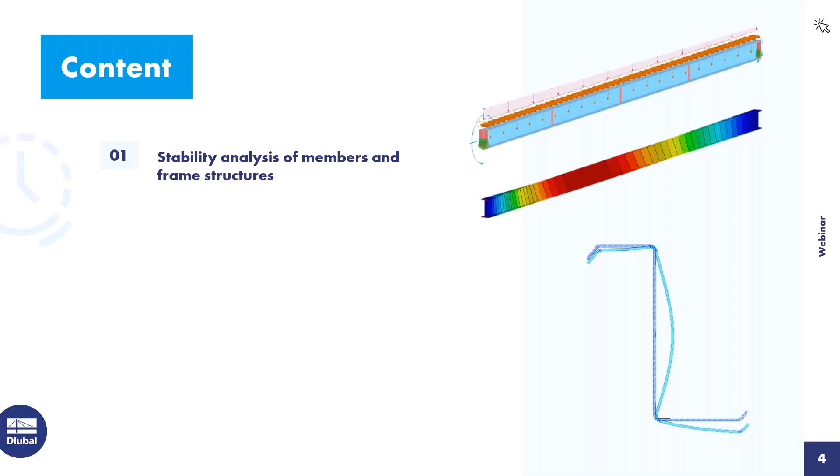Thanks Andreas for the introduction. Within this webinar, I want to show you the linear stability or bifurcation analysis that we can use in RFEM 6 as a tool to assess structural stability. I want to show you how to use this tool and where it is used internally in the background to assist the design of, for example, steel members. I would like to demonstrate this on some smaller example models that I have mostly prepared before, so we will jump into more or less finished models instead of focusing on the modeling of more complex structures. We will do that maybe next time again.

And the table of content looks like this. First I want to focus on the stability analysis of members and frame structures. Second, I want to go to the stability analysis on a cross-section level using the finite strip method. Then I want to show you how the buckling analysis is integrated in the steel joints add-on. And lastly, I want to show you how we can use the structural stability add-on for troubleshooting of instabilities, how we can leverage that for that purpose.

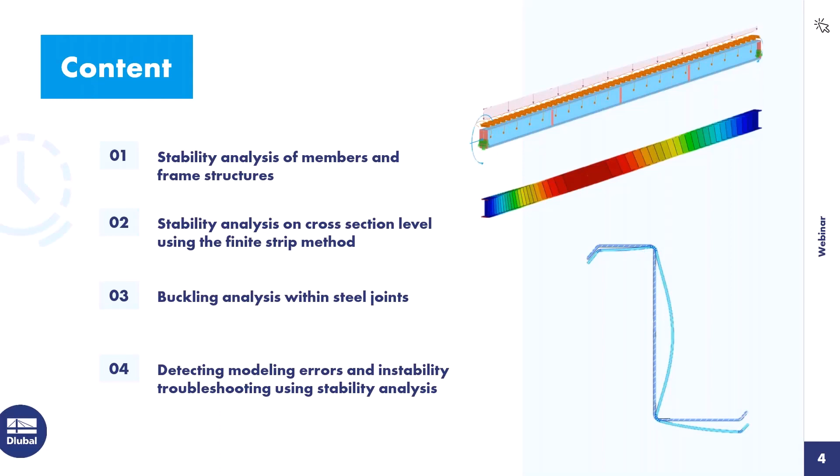Okay, before we jump into the first model, I want to give you a brief introduction and explain at very least a few points that are related to the stability analysis and how we perform it in RFEM 6.

What elements or structures are we taking care of with this analysis method? It's usually slender members and structures under compression that tend to become unstable, where the slenderness of a member or a structure is not only defined by its dimensions. The greater the length of a structure or member compared to the cross-sectional dimensions, the more slender and prone to instabilities it is, but it's also related to material properties. So if I have a material with high strength and low stiffness, then it's more likely that stability failure will be the critical design element as opposed to cross-sectional failure.

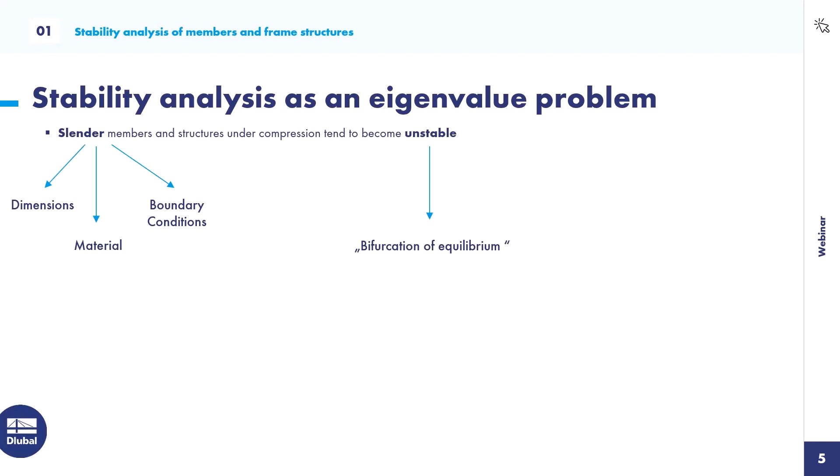Lastly, the boundary conditions play a major role. If I have rotational restraints or lateral restraints for our member, it's not that likely to become unstable. And what do I mean with unstable? When we reach the unstable state, we have no clear state of equilibrium. We instead have a bifurcation of equilibrium, meaning there are multiple paths that the structure may follow. That's why this linear stability analysis is often referred to as linear bifurcation analysis, or LBA. I might use that abbreviation throughout this webinar. Also, the critical load may sometimes be named the bifurcation load.

Using the FEM, the ideal bifurcation load can be determined by solving a conventional eigenvalue problem. So we can set that up and solve that.

In that context, what does ideal mean? It means for the stability analysis that we treat the structure as linear, so we assume a fully linear structural behavior and a perfect geometry. So the base geometry of our model is used in this stability analysis.

The eigenvalue problem in the general formulation has two symmetric matrices, A and B, the eigenvalues lambda, and the respective eigenvectors x. To solve for the unknown eigenvalues lambda, we have to set the first term of our formula to 0, and that's mostly done by calculating the determinant of this first part in the bracket and setting it to 0.

We have multiple numerical tools or solvers to do that determinant determination. In our specific case, in the stability analysis, our two symmetric matrices are represented by the linear stiffness matrix and the geometric stiffness matrix.

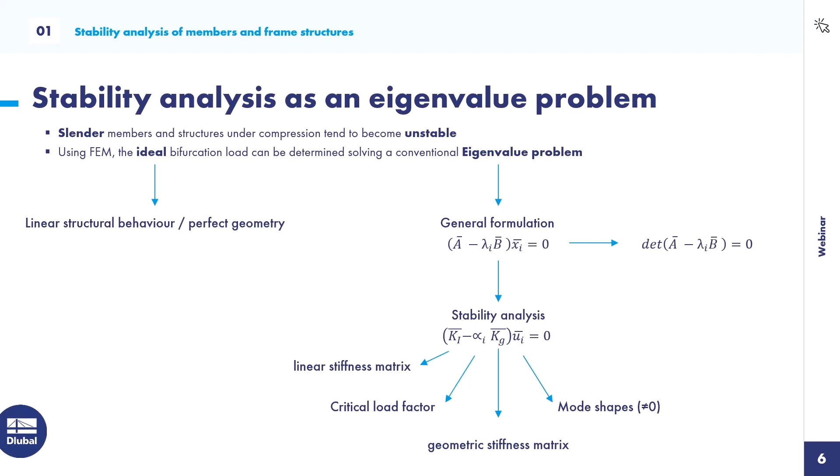We want to start with some fundamental solutions that are very well known amongst civil engineers. Euler already in the 18th century provided some simple analytic solutions for prismatic members under pure compression. They are well known as the Euler cases.

Let's jump into the program, I have prepared some smaller models for you. The first one is this simple Euler case. I have an HEB 300 beam with a length of 5 meters, and I applied a unit load of 1 kilonewton that sets the member under compression.

In order to perform a stability analysis with our add-on structural stability, I need to first activate it, and I can find it in the base data of the model. I activate the respective add-on here, which you can find under analysis add-ons, and click OK.

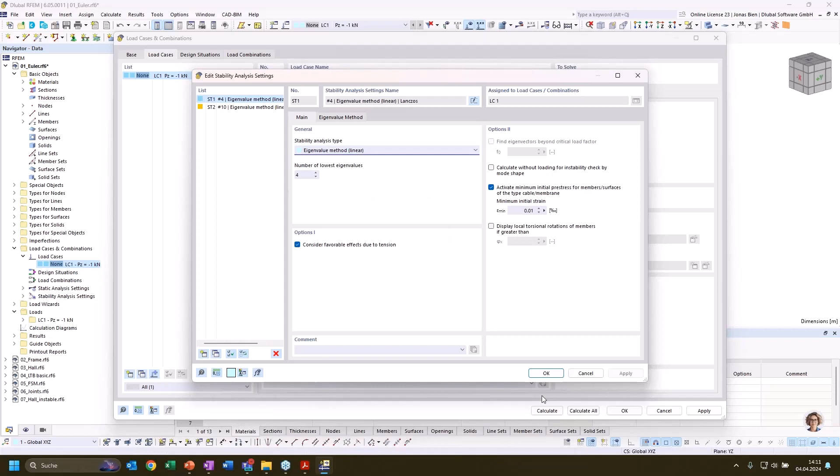Four eigenvalues are enough for our simple case, so I keep this number set here. Then we have multiple solver variants to solve the determinant of our eigenvalue problem, but the default solver should mostly suit us for this problem.

There might be cases where you have subsystems that are not connected to each other. Then this default solver will throw an error and suggest another solver variant. But with these default settings, I can just run the load case.

Now the first thing the program does is solve the static analysis, and then solve for the stability analysis. When I have performed the stability analysis, I not only get the results for the static analysis, but I can also switch to the stability analysis results through this drop-down menu here.

Okay, so what do we see here? First of all, we get a drop-down menu in the upper left corner, and in the table we can see that we have these 4 mode shapes calculated with a respective critical load factor.

This represents the factor which I can multiply the external load with until my system would collapse due to instability. So if I would increase the unit load of 1 kilonewton up to 7,035 kilonewton and run a second order analysis, my system would become unstable and I would get an error message.

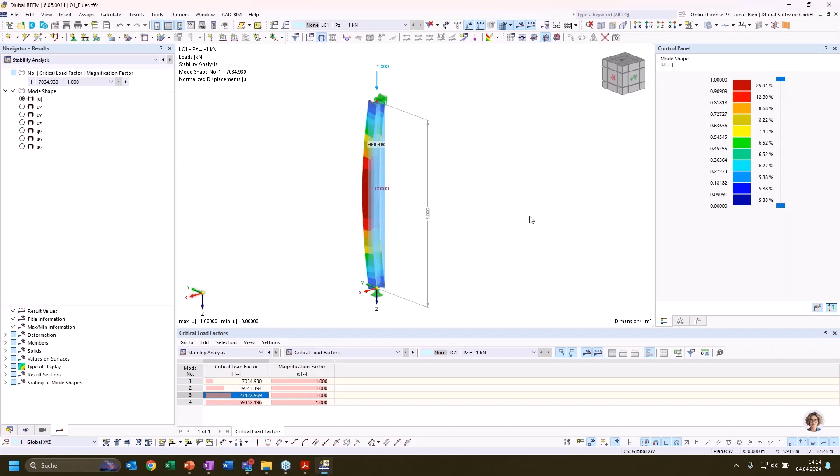Okay, so we can go through the 4 eigenmodes here by clicking the table entries, or also go through the entries in the drop-down menu. We can see the first eigenmode resembles buckling of our I-beam around its weak axis, and it's doing that in a symmetric way. We have a simply supported beam here, so that looks as expected.

Then the second mode shape would be buckling around the strong axis. And the third and fourth eigenmodes are some multi-wave eigenmodes for buckling around the weak axis. These are mostly not very interesting for us, so usually only the mode shape with the lowest critical load factor is of interest for us.

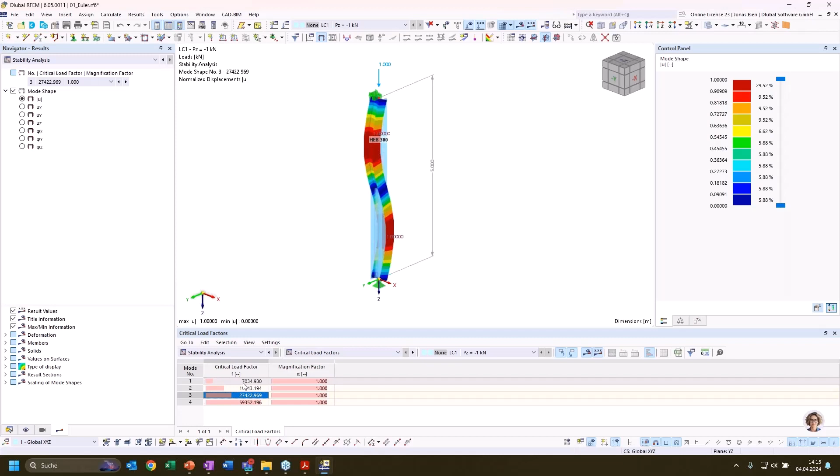And I want to now compare the critical load factor that we have calculated here with the critical ideal Euler load that we have for our Euler case 2.

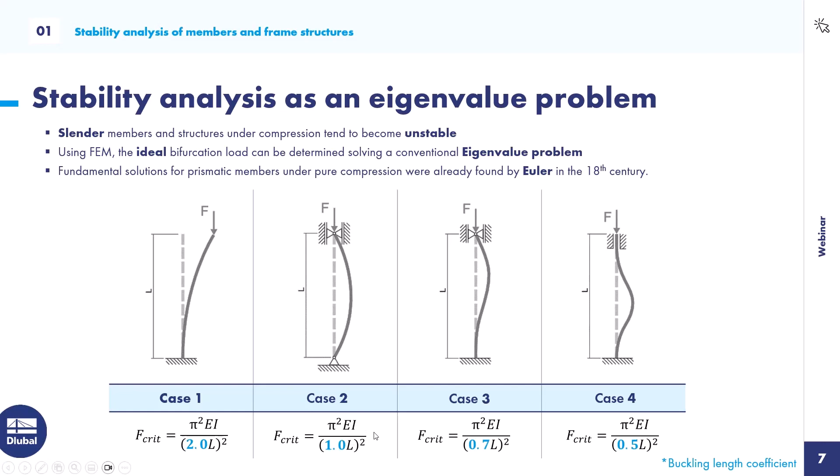Just so that you remember, we could calculate it using this formula: pi to the power of 2 times the Young's modulus times the moment of inertia of our section, divided by the effective buckling length. In this case, it would be the length of our member times 2, to the power of 2.

I could do that using my calculator, but then I would need to look up all the values for my section, the member length, the material properties, and so on. So I want to show you an alternative solution. We can also use the in-app console that we can open via the toolbar, and in here I can reference all the objects that I have in my model.

For example, I could reference my material number 1 by typing this, then typing a dot, and then I see all the options or properties that I can ask this object for. For example, I would find the elastic modulus here, and if I press enter, I get as an output the elastic modulus of our material number 1 in SI units.

So that's important, and of course I can do some more complex calculations here. I could now take this elastic modulus and multiply it with the moment of inertia of my first section.

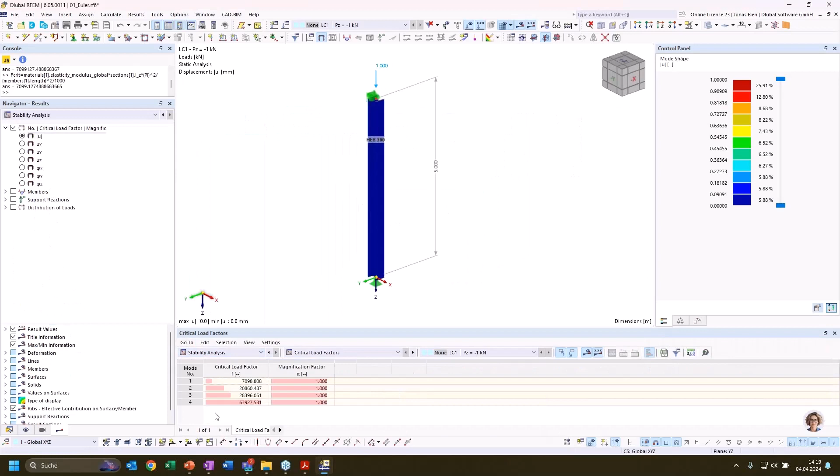And if I again go to the results, we now see that our critical load factor is much closer to the ideal Euler load.

It's really it compares very, very well.

So we could, of course, also calculate the critical load for buckling around the strong axis. Just we need to swap the Z with a Y value, and we have the moment of inertia about the strong axis. This value is quite satisfying if we look at our result compared to the structural stability add-on. So that compares quite well. We've, as we expected, met the results of the analytical formula.

Okay, now that that's set and we are confident that our solution here provides reasonable values, I want to show you another important result of our stability analysis when it comes to member results. This is often used for the later design of the column. If we, for example, would take a classic approach to design this steel column using an equivalent member method, we would need the effective buckling length, and we can use the structural stability add-on to calculate it.

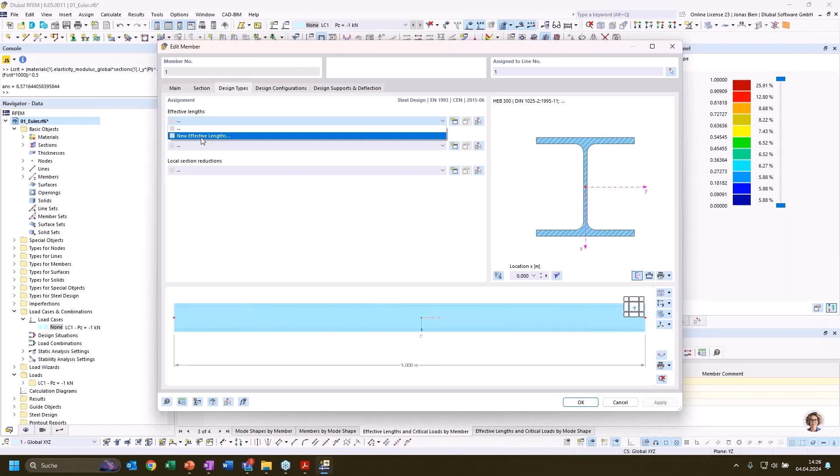One thing I want to show: we can directly import these buckling lengths into our design add-on. So if I want to design this column here with our steel design add-on using the equivalent member method, I have to assign these effective lengths.

Here I have the option to import the buckling length from the stability analysis. If I click this, we get another tab where I can enter the load case, the mode shape, and the member number. Now it would take this buckling length coefficient from mode number 1 for beam number 1 and evaluate the effective buckling factor for the design.

In this case, we have to take care that buckling around the strong axis happens in mode number 2, so we would need to enter mode shape number 2 here, and mode shape number 1 would be for the buckling length coefficient for buckling around the weak axis. So that would fit and suit our expectations.

Of course we can do that for more complex systems as well. We just need to keep in mind that when we have a more complex system and change something, the order of the mode shapes can also change. They are always sorted by the lowest eigenvalue or lowest critical load factor, so the mode shape with the lowest critical load factor is always mode number 1. If we change something in our system, this sorting can change, but these entries need to be checked again because they are not smart enough to adapt to the changed model, so we would do that manually.

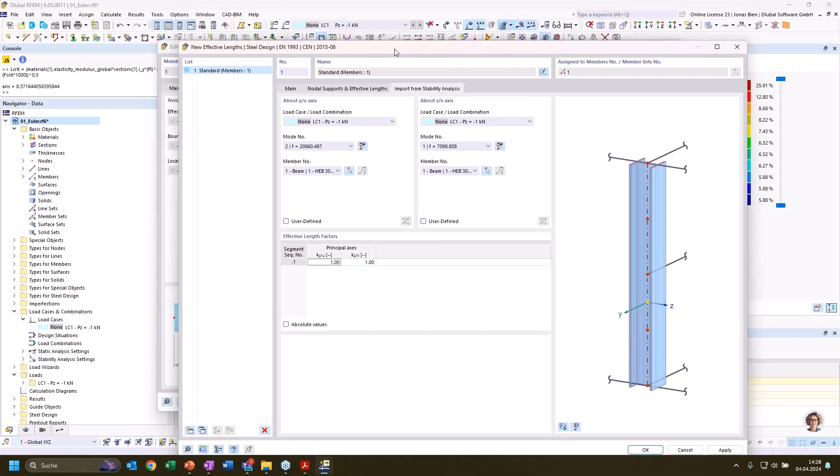So sometimes it's just better to do the stability analysis and then manually put in the buckling length coefficients here, and we don't need to make any more thoughts about it.

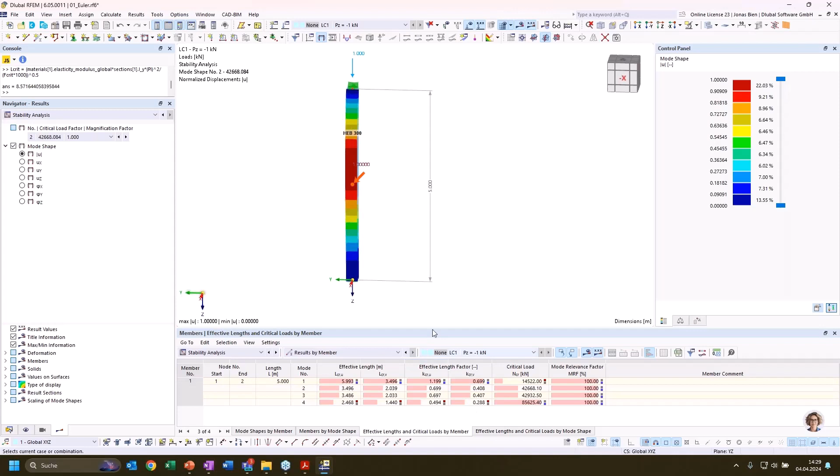But that's not what I want to focus on now. I want to show you instead how the buckling length coefficients adapt when I adjust the statical system. So when I take a rigid boundary condition at the bottom of this column, it should now calculate a lower buckling length coefficient because the system resembles Euler case number 3, and we know that here we'd expect a buckling length coefficient of 0.7 — and that's exactly what we get for the first mode shape for the weak axis and the second mode shape for the strong axis in this case.

We also need to consider that for these known cases, why should I use my add-on? I can just apply the Euler formula and calculate my buckling length. But what if we have a certain spring stiffness here, somewhere between Euler case number 2 and Euler case number 3? Here it's not so obvious what the buckling length for our equivalent member check would be.

Of course we could look into textbooks that have these cases covered, but we can also use the structural stability analysis to evaluate the effective buckling length factor here, and as we expected, it is between 1 and 0.7.

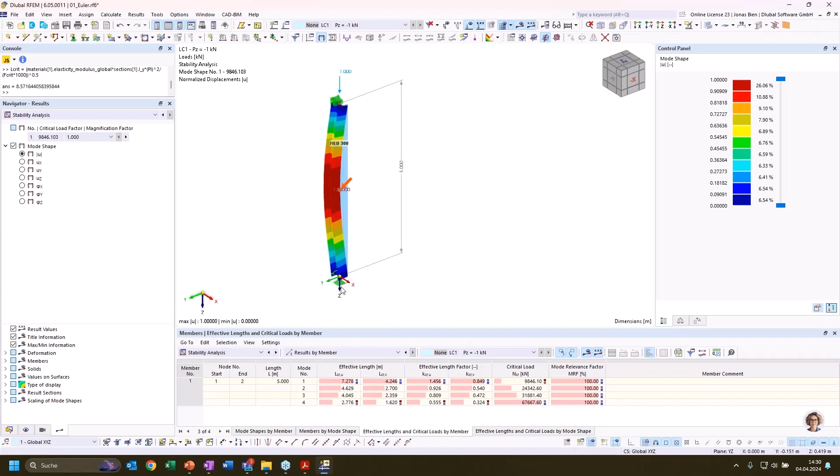So everything's set. Because it's a linear analysis, it's interesting what the program does with nonlinearities. So, for example, if I apply some kind of nonlinear boundary condition here, which at first glance doesn't look that nonlinear — in this case I want to apply a stiffness diagram where the stiffness of our spring at the column bottom relates to the vertical load, but as you can see it should be constant, no matter what the vertical load in the column is, the spring constant should always be constant. So it doesn't look nonlinear at first glance, but we have to take into consideration that all these nonlinearities are ignored in the structural stability analysis. I want to just demonstrate this.

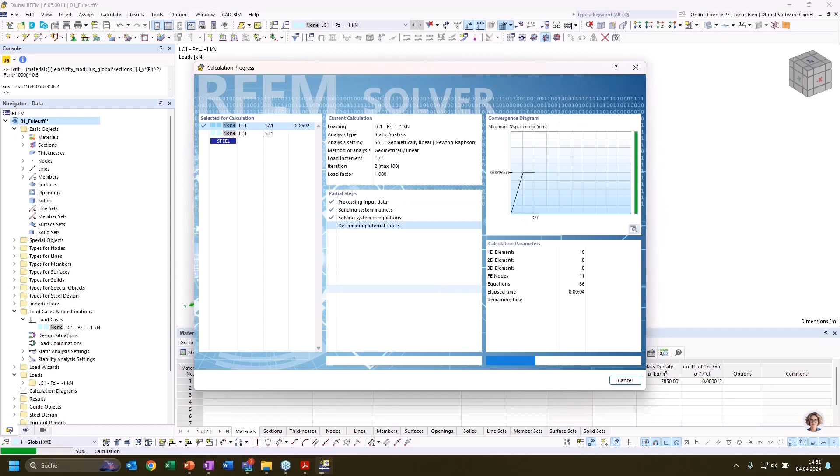So although we have set this nonlinear spring stiffness at the bottom, as a result we get Euler case 2, where a pure hinge is assumed at the bottom. So when it comes to the supports, only these entries are taken into consideration for the structural stability analysis.

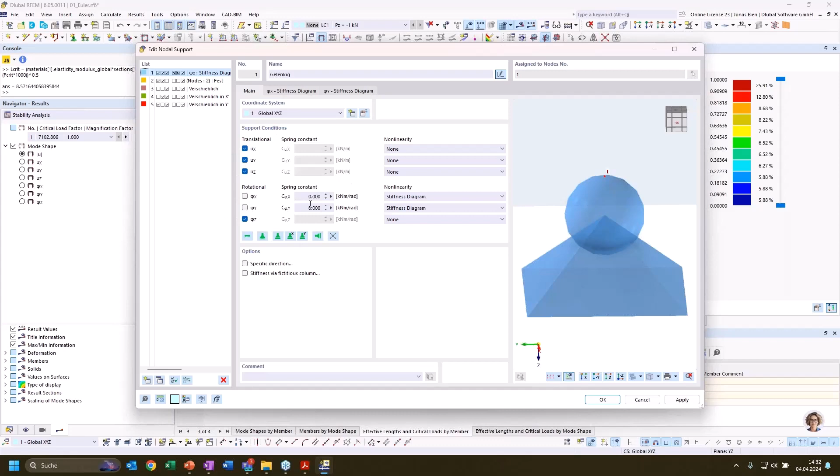Of course, when we are working with other nonlinear elements such as tension rods or buckling members, these are taken into consideration or not according to their state in the static analysis. So if we have a tension member that is under tension, it will be taken into consideration in the structural stability analysis as well, and vice versa.

Okay, then one last thing to finish this simple example. Let's delete this nonlinearity and see what happens if we divide this member in half.

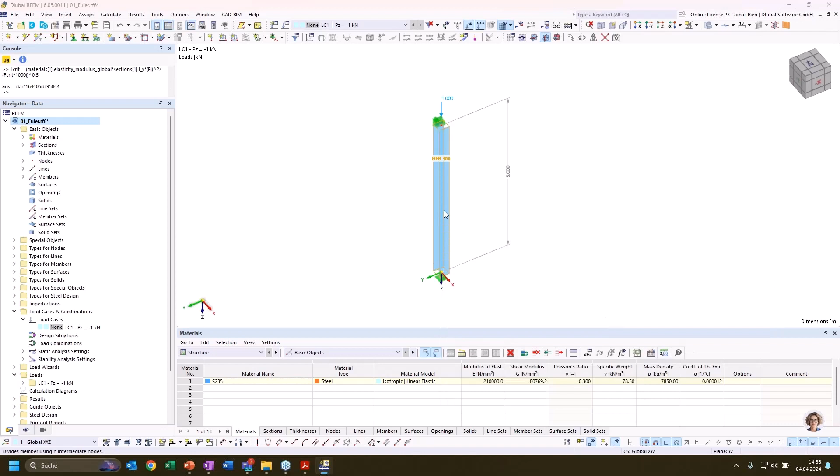I just introduce an intermediate node and divide this one column into 2 separate members, and again run the structural stability analysis.

What does it do with the buckling length? Is it still valid, or does it give me some weird results? Let's see. The critical load factor is still the same as if we wouldn't have divided this column.

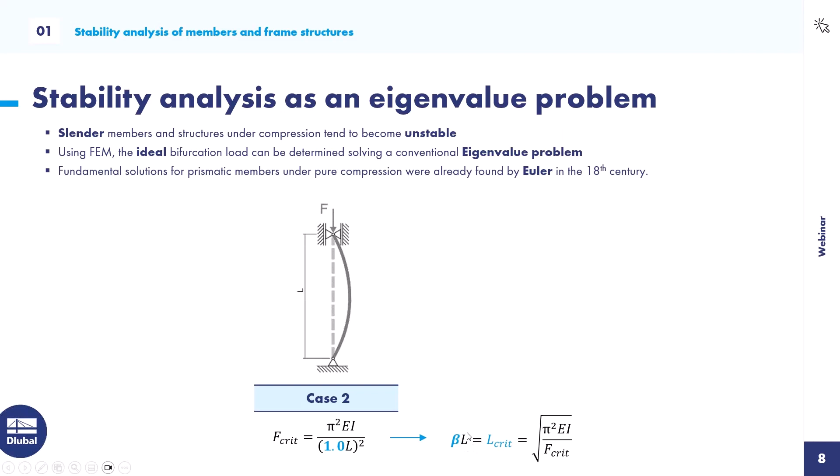Now the buckling length, or to double-check it again, the effective length of our members is also the same. So now we have two members, but the effective length for each member is still 5 meters, and that's expected when we look at the formula for calculating the critical buckling length, because the Young's modulus, the moment of inertia, and the critical load factor have not changed. The only thing that changed is our reference length L for the member. It's divided into half, and that's only visible in the buckling length coefficient, which is now 2 instead of 1 for each member.

So we could still use this effective length factor for the stability design within steel design, or some design add-on. It would still be valid.

Okay, now let's increase the complexity a bit. What if we have more than one member in our model? In this case, we have a 2D model of a 2-hinged frame with an additional column, number 5, that is just connected to this 2-hinged frame by a truss member.

So this is basically a simply supported column, just as we have seen before, which leans toward this 2-hinged frame, or is supported by the 2-hinged frame at the column head. All 3 columns, member numbers 1, 3, and 5, are loaded with a load of 1000 kilonewton in compression. Now let's perform a stability analysis for this load case as well.

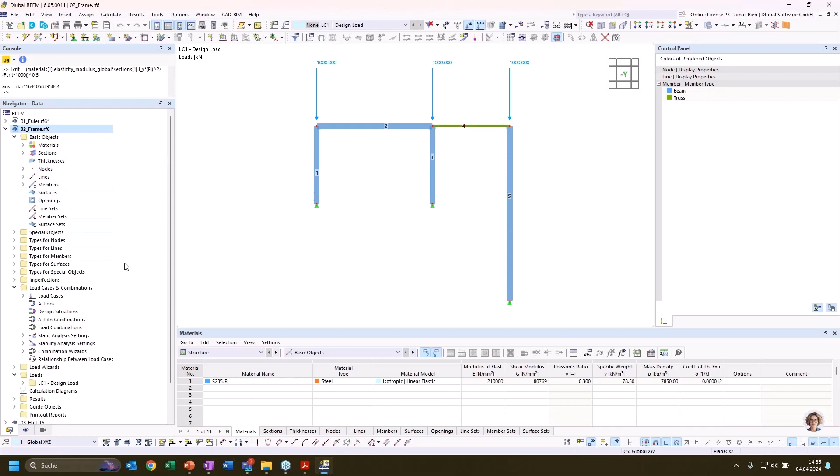It should be all set for this analysis, same settings as we used before for the Euler case. And accordingly, we also get 4 mode shapes for our structure.

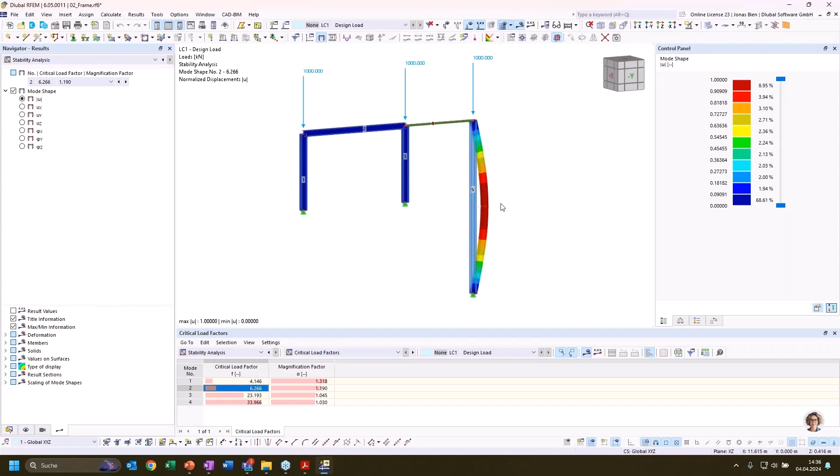I want to quickly browse through these mode shapes together with you. The first one is some asymmetric lateral deformation of the 2-hinged frame, and the connected pinned column also moves with it. The second mode shape represents buckling of the longer column with pin supports around the strong axis. The rest of the structure does not seem to have any deformation.

The third would also be a higher mode of this pinned member number 5. And mode shape number 4 would resemble a symmetric buckling mode of the 2-hinged frame, without any participation of the simply supported column at the side.

So if we want to extract the effective length for the columns of the 2-hinged frame, we can go to the member results of the stability analysis and check the effective length by member. I can click on one of those members and I'll automatically be routed to the respective table entries.

In the first mode shape, this 2-hinged frame suffers from buckling around the strong axis, and we can read the effective length factor for the strong axis in this column. We get an effective buckling factor of 2.8, which is in the expected range for such 2-hinged frames.

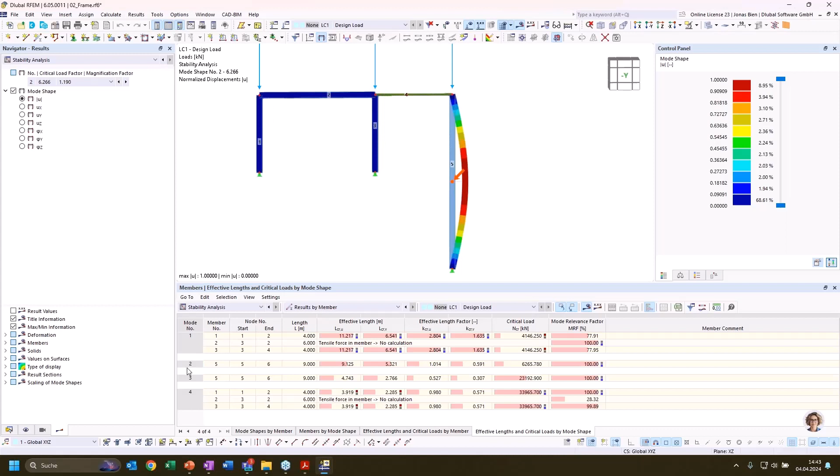We can, of course, also use the filter function to make our lives a bit easier when browsing through this. For example, we could say that we are only interested in members that have a mode relevance factor greater than 20%. And if we do so and now go through the mode shapes, we see, okay, for mode number 2, we have only one entry that should be a localized stability phenomenon and not so much related to a structural failure of the whole structure or substructure of the model.

So that way we can use the mode relevance factor to somehow filter mode shapes for our purpose, for example, for the determination of effective length factors. Because here I would go the other way around: when I'm interested in the relevant buckling factor for column number 1, I would go through the modes

that I have calculated and only take into consideration the mode shapes that have a mode relevance factor that is significant, and read my buckling length factor from the mode that has the lowest critical load factor. In that case, I would definitely take the value of 2.8 for column number 1 and also for column number 3.

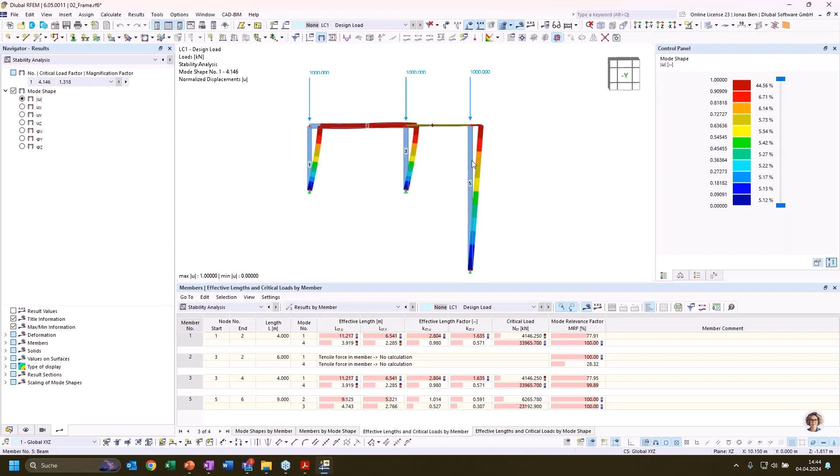All right, but I want to show you in the next step how we could also leverage this tool in a more realistic setting, or how to approach the buckling length determination in a more realistic model.

So here we have an industrial hall. We have a lot of different load cases here that of course would give us, I don't know, probably about 100 or 200 load combinations. Of course, in some applications, we can have a lot more load combinations. And then the question is which load combination, or the first question for our buckling length determination, is which load combination is most severe for buckling for a specific member.

And I have now, for this case, deliberately started with result combinations, because sometimes, for example, when I want to design bridges or so, I may have 10,000 load combinations, and it's not possible to calculate all 10,000 load combinations and assess them for stability. So what I would recommend, if you have too many load combinations to handle in one model—of course here it would be still feasible and no problem—but if you have additional load cases, that can be a problem.

I would, in the first step, calculate my combinations with result combinations to get the envelope of results. I need to calculate the design situation where all the complete envelope of all result combinations is given. Then, for example, when I want to design the columns for buckling, I would look into the internal forces in this envelope solution and look for the most critical ones, which would of course be the combinations that give the highest compressive load in the columns. I can find those by going to the static analysis results for this design situation, results by members, internal forces, and then stick to this middle column here. I would click the column and get in this result combination all extreme internal forces for this member.

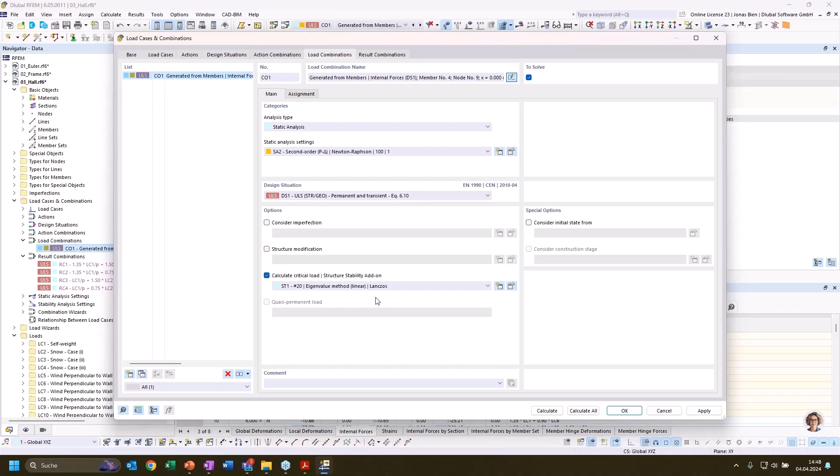Now from the result combination, I can just right-click this combination to generate a load combination from this table. For this load combination, where I have the feeling that this could be the most relevant for buckling of our columns, I can now perform an eigenvalue analysis, a linear stability analysis, by activating it here and calculating it. So now I very specifically run the stability analysis for just this one load combination that I have generated from the envelope.

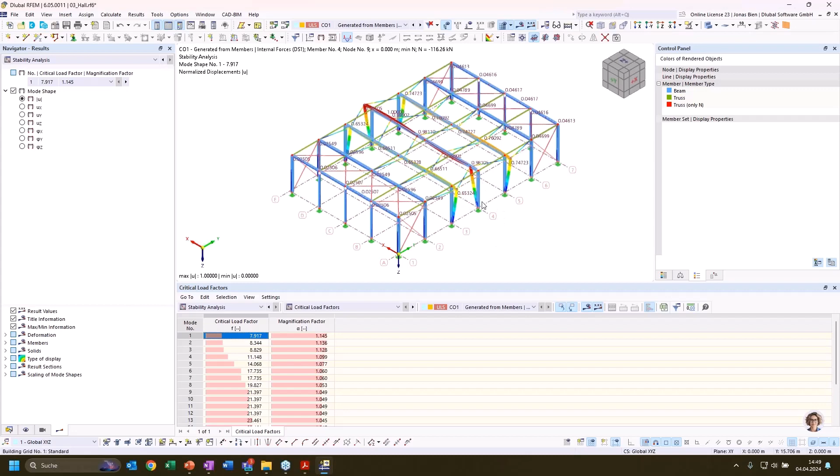Now the second question, after we have sorted the first question of which design situation could be relevant, I would have to figure out for this column which mode shape is the most relevant for determining my buckling length. So again, as before, I have 20 critical load factors and mode shapes, and I can browse through them. I see some involve deformation or buckling of the frame where this column is involved. Some are only isolated buckling of those columns, or some compressive member in the roof. So these wouldn't really interest me.

In order to filter these out, I can again use the mode relevance factor. I just go to the table effective length and critical loads by members, click on my member number 4, and get the whole table. So I get the mode relevance factor for all 20 mode shapes that I have calculated, and I see that only in 2 of these mode shapes is my column member really participating. So these would be the only 2 mode shapes suitable for extracting the buckling length.

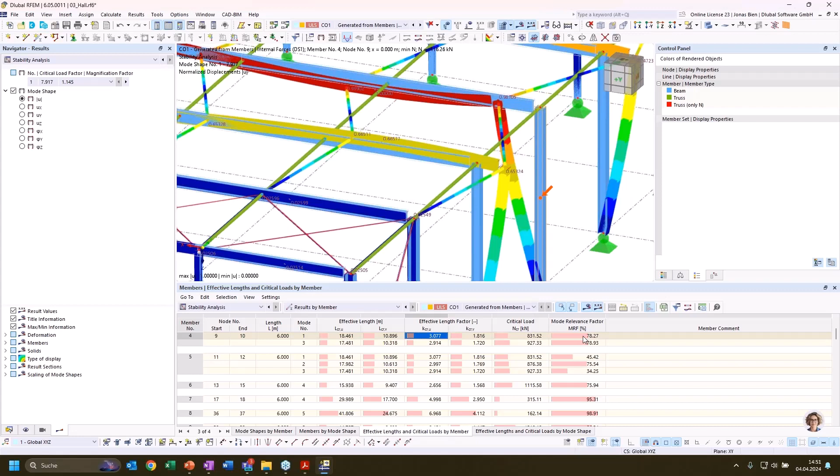I could, of course, again apply the filter to make it more accessible. Then I would follow the rule from the last smaller example, taking the mode that has the lowest critical load with a significant mode relevance factor, and take the effective length factor for, in this case, buckling around the strong axis from this mode shape. So this is how the mode relevance factor can help you assess the relevant mode shapes for a particular member design. Yeah, that's what I wanted to show you on this model.

Now I want to take the next step and highlight something you may have noticed so far. We have only discussed the flexural buckling of members, but especially in steel structures, other stability modes can also govern the stability design, namely torsional buckling or flexural or lateral torsional buckling. We can also take those into consideration with our structural stability add-on, but we need to activate warping torsion in order to detect those stability modes.

I want to make another small example where we investigate the lateral torsional buckling of a simple system, where again, as in the first Euler case, we know the exact solution, and I want in the first step to compare the values we get from RFEM with the analytical value. So in order to perform a structural stability analysis where we can also consider lateral torsional buckling, we would, in addition to the structural stability add-on, also require the torsional warping add-on.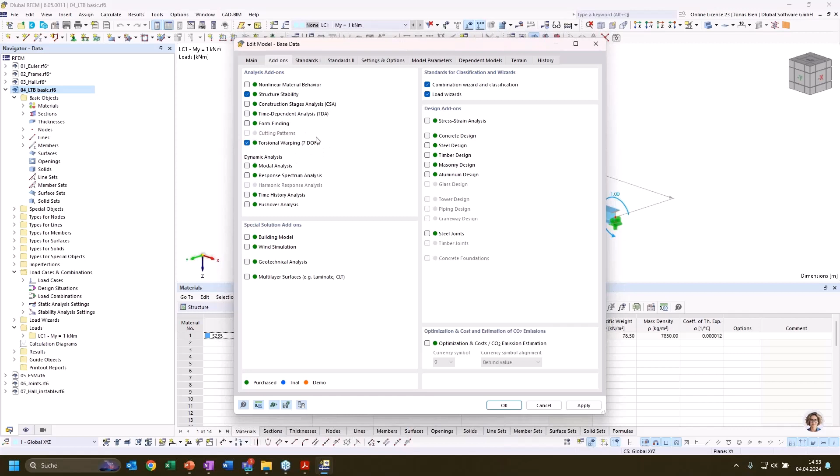As soon as we activate the 7th degree of freedom, this would be directly included in, or taken into account by, the stability analysis. I have now this simply supported member, an HEB 300 again, with a length of 10 meters and a constant bending moment.

I could run the stability analysis, and now we are not getting flexural buckling modes for this member at all because we have no compression in it. I didn't activate the structural stability analysis for this particular load case, so I will just do that. Now we should get a lateral torsional buckling mode.

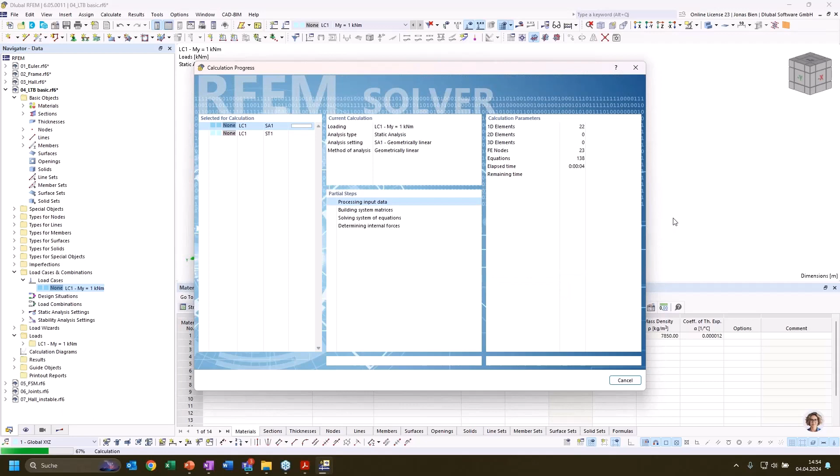When we switch to the results of the stability analysis, we can see very clearly this characteristic deformation of our member. It tilts and at the same time moves in the direction of the weak axis. Again, we get a critical load factor, and this one we can compare with the analytical solution.

For this simple system, an analytical solution can be easily found in textbooks. It was once implemented or written down in some of the codes, for example in the old German steel construction norm DIN 18800. I think in some national annexes of Eurocode 3 this formula is also given. But for our convenience, I already plugged this formula to calculate the critical bending moment for lateral torsional buckling into our global parameters.

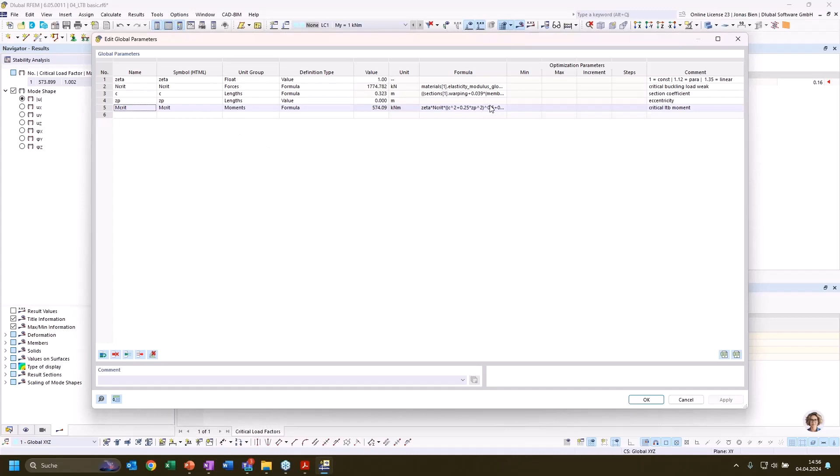So that's another thing I can do instead of just using the console and typing in commands to evaluate certain parameters or values - I can also use global formulas and global parameters to calculate something. For example, I have created a formula for the evaluation of Mcrit, and we can look at what goes into it. Maybe this looks somehow familiar to you.

Here we have a value that describes the moment distribution, which is zeta - it's 1 in this case for this simple case with uniform bending. Then we have the elastic buckling load, Ncrit, which is the one we already assessed in the first example. Then we have a parameter C that takes into account the warping and torsional stiffness of our section, and we have ZP, which resembles the eccentricity of the loading, which is in this case not important. What we get from this formula is a critical bending moment of 574 kilonewton meter.

We could also use the console again to evaluate this. All the global parameters that we have stored, we can call them here in our console. In this case it's written in SI units, so I would need to divide it by 1000 to get to kilonewton meter. This is very close to the value we evaluated with the structural stability add-on, so it works again quite well.

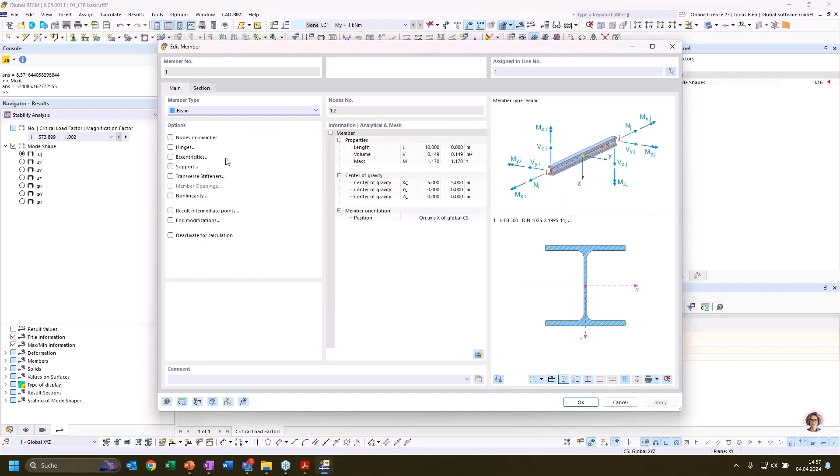But as in the Euler case, we can use our structural stability add-on to investigate much more complex cases. For example, we could add a member support. I go to the member and add a support, and I get this tab where I can enter a member support. I could manually put in some rotational restraint, and I could even apply an eccentricity of this member restraint - for example, a rotational restraint at the top of the flange.

We can now also in the global analysis take into consideration shear panels and rotational restraints. These are entered as fictitious stiffness. You may know them from steel design, aluminium design, or timber design, where you always had access to those restraints, but they were only considered in the design of the member, in the design add-on. But we can now use them in the global structural stability analysis as well.

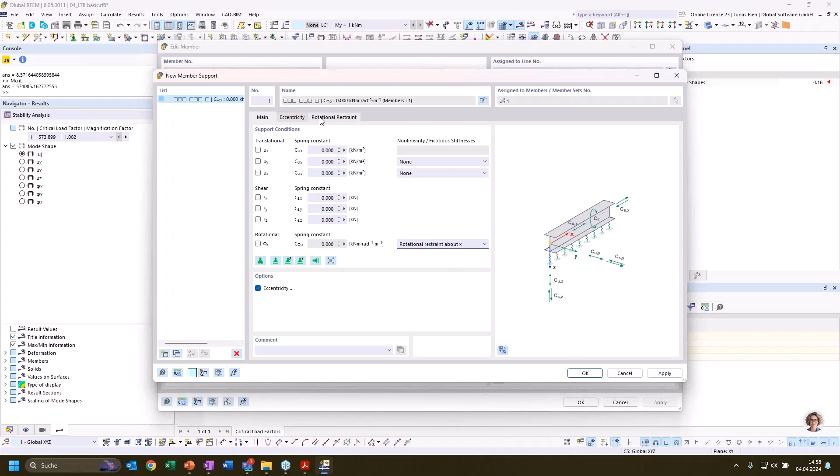So I could, for example, define a rotational restraint - for example, I want to consider some kind of sheeting that I have on top of my girder. I will now just take some random settings, more or less, using some sheeting just to get some stiffness.

Of course, these values were accessible all the time, but now we can also leverage or use the stiffness that we define here in this global structural analysis. One thing that is also new, and I want to highlight to you, is that for the spring stiffness of the connection between the trapezoidal sheeting and our member, and also for the load introduced to the sheeting, we can now set load dependent values.

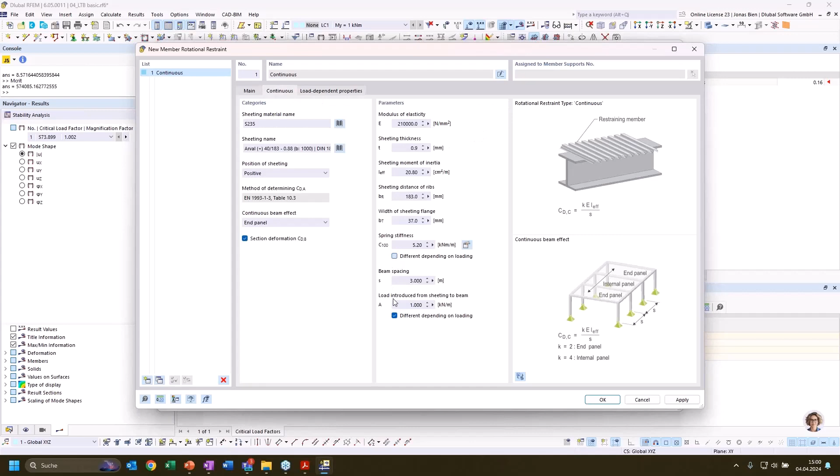If we click these options here, we could, if we had multiple load combinations we'd like to investigate, set different values for different load combinations—for example, distinguishing between situations where we have suction on the roof and compression or pressure on the trapezoidal sheeting. We could take this into account by adding different values here in the table. This is also quite new, since a few months.

With this rotational restraint, I could also add a shear panel. And by the way, we are now able to add a shear panel not only in Y direction, but also in Z direction, which could be interesting for columns that are also girders rotated by 90 degrees for some reason. We can also use that now, since some weeks.

We have now calculated directly some stiffness for the rotational restraint from our trapezoidal sheeting, and we could consider this in the stability analysis to take it into account. By default, these fictitious stiffnesses—so the trapezoidal sheeting in this case—would only be accounted for in the design add-on.

So if we activate the steel design add-on, for example in this case because we have a steel girder, and I now activate the lateral torsional buckling check according to the equivalent member method, we already see here that the default way of calculating the critical moment value is using the eigenvalue method—the same method we also use in the structural stability add-on.

Of course, we need to set some boundary conditions here for the design add-on. But in our case it's quite simple—we have simple support with fork supports, and that's what the default settings are also for the effective length settings. So that should be all right.

In order to perform the steel design, we also need a design situation and some load combination inside this design situation. I will just add a load combination with 1 times the first load case. And if we now do the calculation, we run a static analysis, then the structural stability analysis of this member, and then the steel design analysis.

Let's check the results and compare them. First, in the stability analysis, it seems like nothing has changed—we still have a critical bending moment of 574 kilonewton meter.

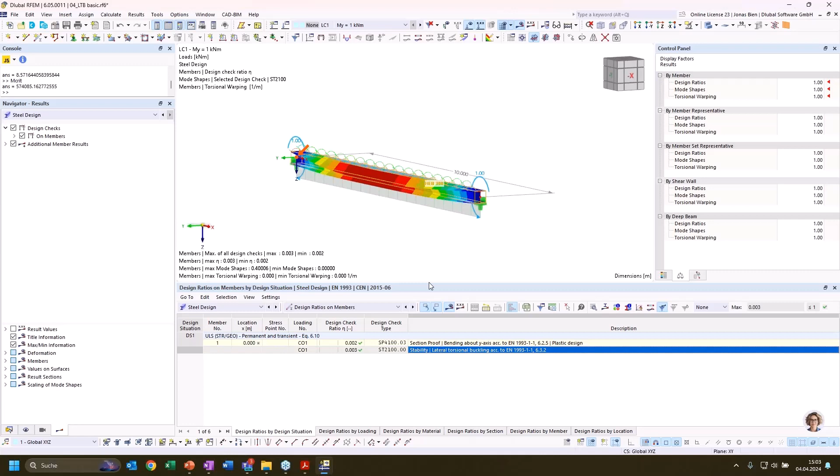But in the design add-on, let's check the result here. We have now the check for lateral torsional buckling here. We can also see what the relevant mode shape would look like if we click on design details. And if we double click on the design details, we can also check what value for Mcrit is evaluated in the internal eigenvalue analysis.

We see that now in the steel design add-on, the rotational restraint on top seems to already be taken into consideration, because we have a much higher critical moment in our steel design add-on, while in the structural stability analysis the values stayed more or less the same.

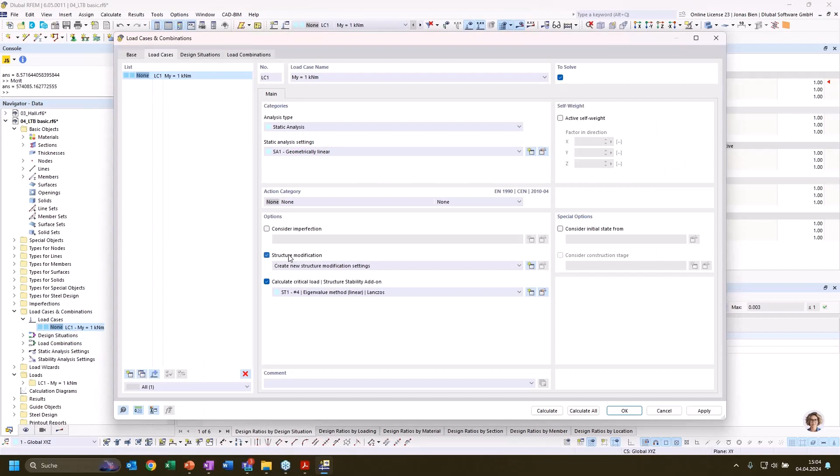But we have now the option to take these fixture stiffnesses into account also in the structural stability and static analysis. We can do that by adding a structure modification to this load case, and here we just need to activate the option to consider shear panels and rotational restraints also in static, stability, and modal analysis.

Before, it was only possible to take these shear panels and rotational restraints into account in the design, so in the LTB design within the design add-ons. But now we also moved this possibility to the global analysis.

This is because you may want to perform a lateral torsional check, like using a second order theory analysis with imperfections, and maybe you also want these rotational restraints to be effective in this global analysis in this matter. So that's why we added this option through the structural modification.

What is also new is that you find these objects—the member shear panels and the rotational restraints—now under types for members, and not anymore under the types for the design add-on. In earlier releases, we had those two objects under, for example, types for steel design, aluminium design, or timber design. Now you find them under general objects for types of members.

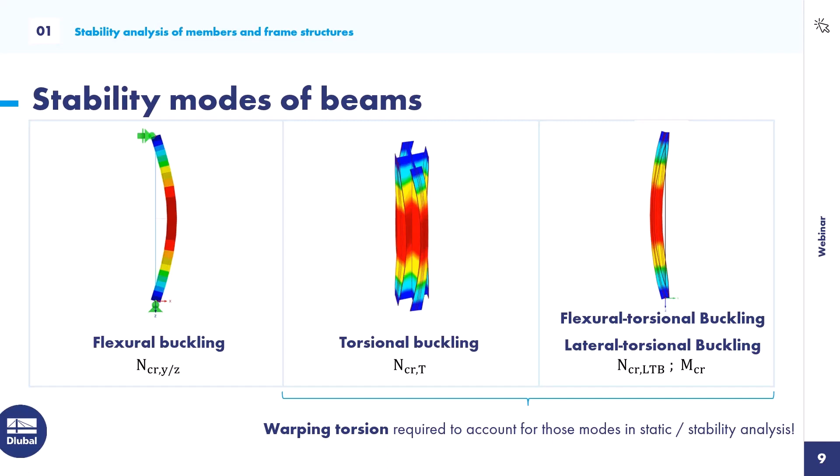If we are interested in local buckling of the cross section, we could extract from these beam models a shell model - that's quite easy in our software. You just right click on a beam member and say you want to generate a surface model from it, and surfaces are directly generated with the correct thicknesses, just as they had for the member. For example, the top flange would already have a thickness of 19 millimeters corresponding to the HEB section. Then we could mesh this very finely to do a stability analysis for this shell model.

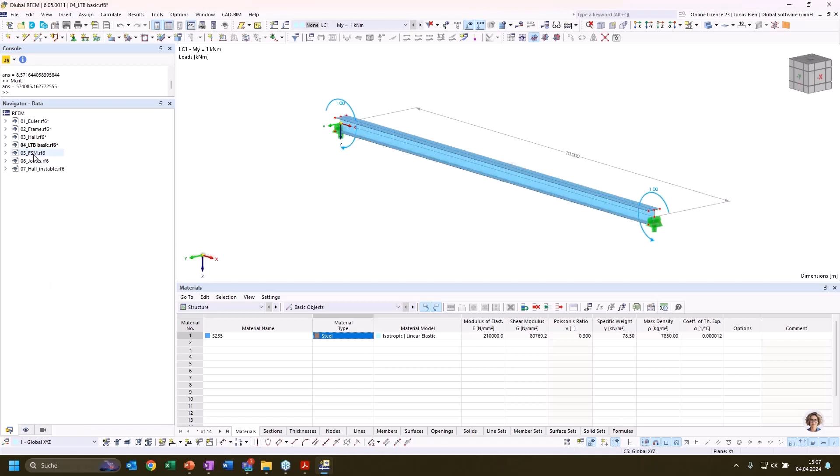By doing so, we could also analyze local buckling modes of the section. Since it's not very interesting to do it with a hot rolled section, which isn't susceptible to those local failure modes, I want to do it with a cold-formed thin-walled section. So here I've prepared a fifth model with a parametric C section with a height of 200 millimeters, width of 75, and a wall thickness of 2 millimeters - a perfect example for a thin-walled, cold-formed section.

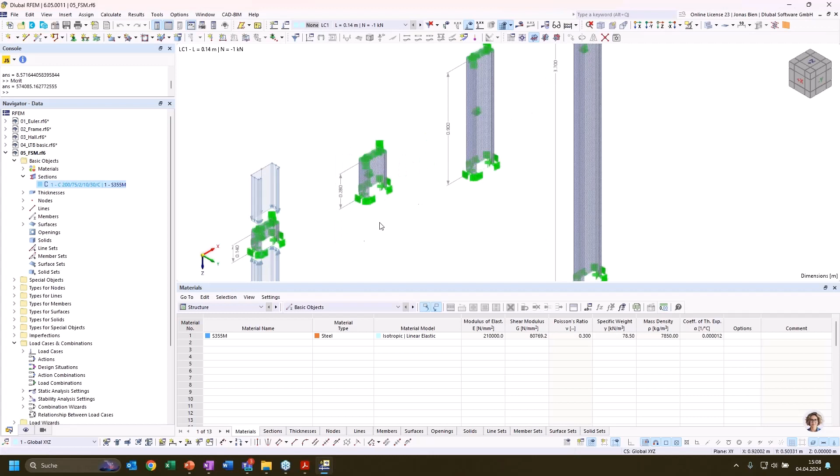As I just showed you, I've transferred my beam model into a shell model, meshed very finely to capture all the relevant local buckling modes. Then I've modeled 4 different members with different lengths: a very short element of this C section, one with double the length, one with a length of 90 centimeters, and a very long C member as a shell model.

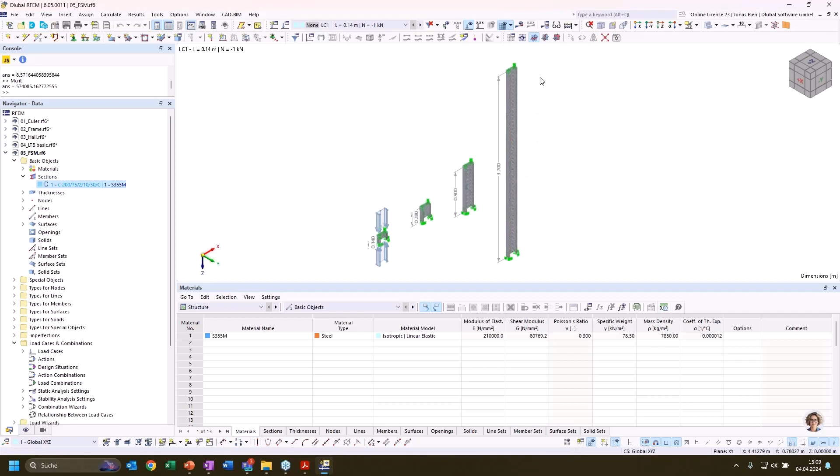I've applied boundary conditions that avoid any unwanted singularities in the model, and applied in 4 different load cases a unity load to the top and bottom of these column stubs. So as in the first step, that should resemble the Euler case - a beam with a certain length with uniform pressure applied. But in this case I have a monosymmetric cross section which is very thin. Let's check out the results - what do I get from such a stability analysis?

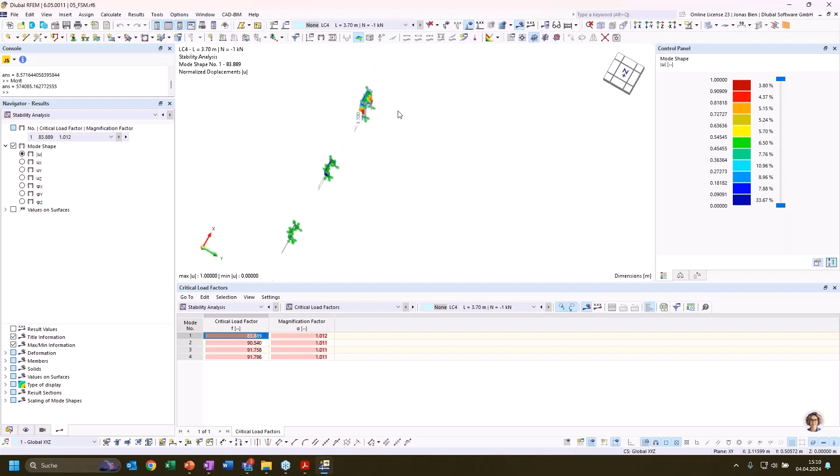I've performed a stability analysis of the shell model. If we look at the results for the longest segment, this 3.7 meter long C section, I have the first critical load factor at 84 kilonewton, and the mode shape resembles flexural torsional buckling. In this case, I don't see local buckling of the different cross-sectional elements, but the whole section deforming at midspan.

If I check the second mode shape, I have buckling about the weak axis. The third mode shape involves local buckling of the web, and this we can only see with such a refined shell model.

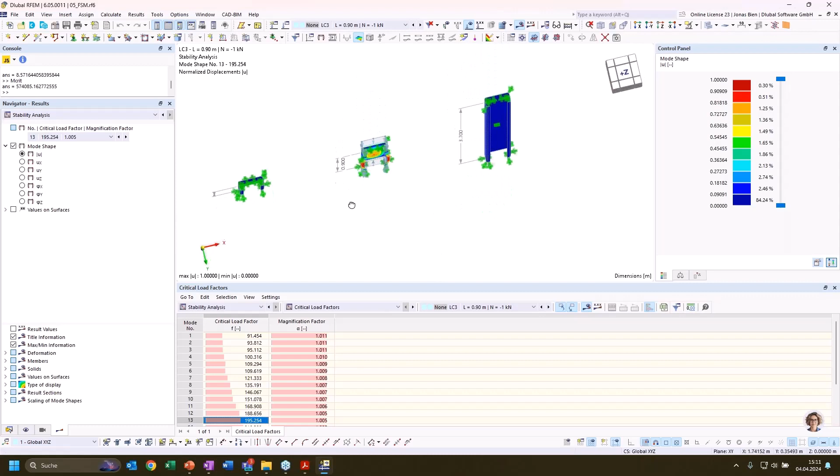Now what happens if we take a shorter column? We see that the critical mode shape is governed by local buckling - so global buckling like flexural torsional or flexural buckling wouldn't be the major issue, but stability failure would be more related to local buckling of the web. I can go through this and find several mode shapes where especially my web buckles in different configurations, and then in mode shape number 13 I find a mode shape particularly interesting for cold-formed members: distortional buckling.

In this case, not separate elements of the cross-section deform, but the whole cross-section bends, so to say. If we look at the midsection, the lips deform horizontally while the web also deforms. For the very short configurations, I again find the local buckling modes. What's also important to note is the critical load factor doesn't change significantly - it's not changing a lot when we compare the three smaller column segments. We're always around a factor of 90.

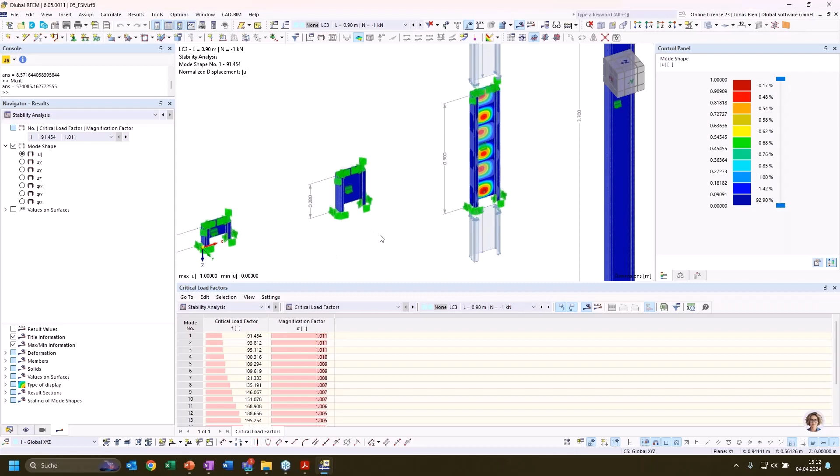But of course, this type of analysis comes with a drawback. It's quite cumbersome to prepare this kind of model. We see that we require quite a fine mesh to get valuable results, and calculation in this case would take like 1 or 2 minutes for these 4 cases, because there are quite a lot of elements and degrees of freedom to solve.

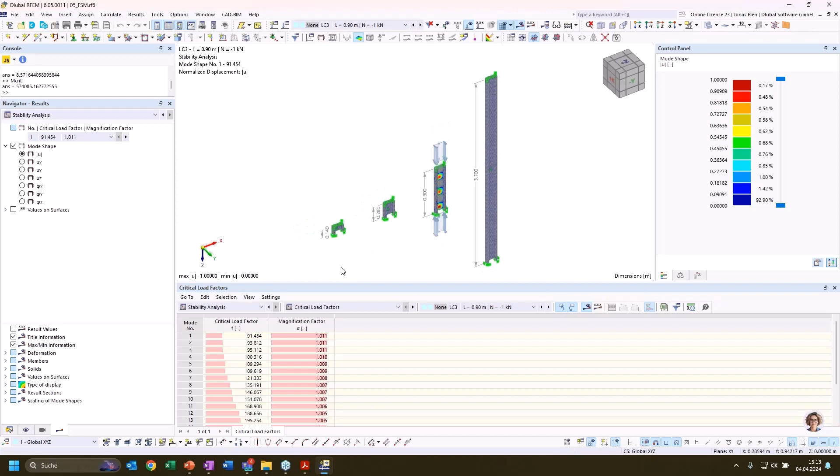But we have another alternative option to investigate such failure or local instability modes on the cross-section level, and this is kind of hidden in the edit sections dialog. That's why I want to show you that and highlight that we have this feature.

So for a particular section, we have on the right side this preview of the section with all the dimensions and so on. Below that, we have a drop-down menu where we can find a lot of interesting features and functions of this cross-section, for example unit stresses under certain loads. But right at the bottom, we also have the possibility to investigate the buckling shape of this section for some unit loads, for example for a 1 kilonewton compressive load or for 1 kilonewton meter bending moment around the strong axis and so on.

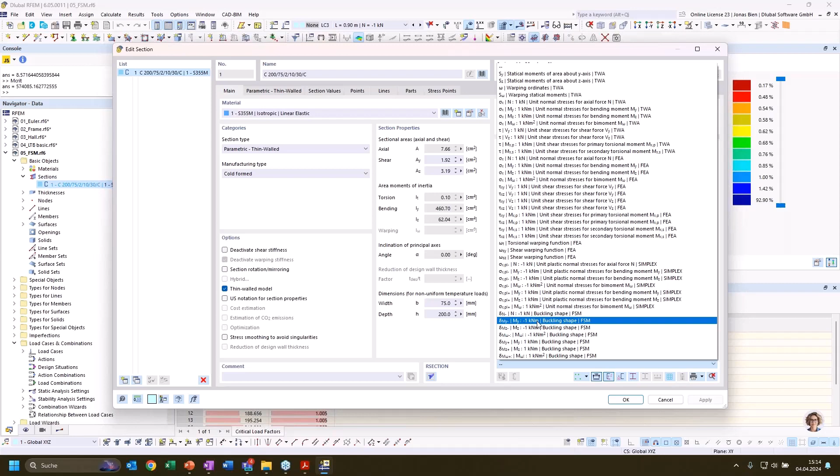And if we click on that option, I can see that I get a diagram as a result. What I get here is the so-called signature curve for our cross-section, and it gives the relationship between the critical bifurcation factor for this unit load, 1 kilonewton compression, in relation to the member length. So we can see that like in the start, we have a very low member or small member length.

In this case, for example, the first minimum is evaluated for a member length of 14 centimeters, which would be the smallest column stub that we have just investigated with our shell model. And when we look at the respective bifurcation factor, we see that it's around 90, which does very well correspond to the linear bifurcation load that we have received from the stability analysis on the global level in the shell model.

On the right side, we can also see how the cross-section deformation would look like in this particular mode shape. And we can go along this signature curve and investigate the different mode shapes that would be critical for a certain buckling length.

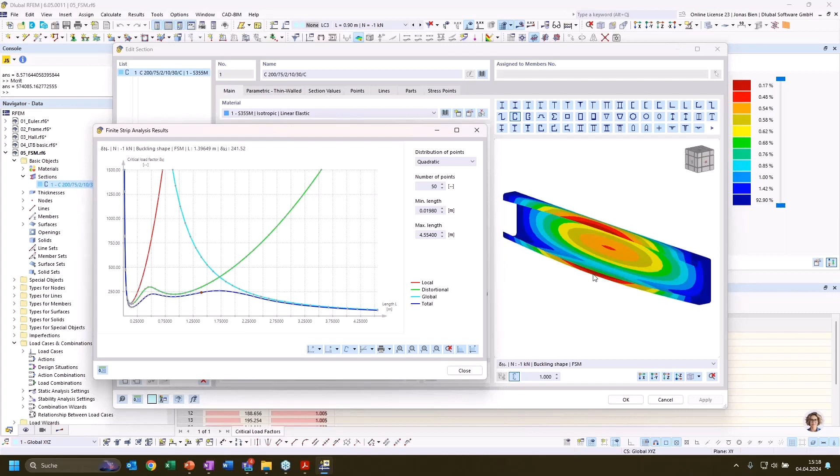And what happens in the background? As soon as I start this feature here, in the background, the finite strip method is employed, and I want to show you what that means. Because as we have now already discussed, we can do stability analysis of beams, which has the advantage that we have very few degrees of freedom. Or we could also investigate stability of members with our shell model, but here we have a lot of degrees of freedom, and solution takes quite a while.

And the finite strip method is some kind of intermediate accuracy solution where we divide the cross-section into multiple strips, and only one strip or element is used over the length of this member. And when we activate the finite strip method in the edit section dialog, a lot of these FSM members are generated, and the eigenvalue analysis is performed, and the eigen shape is stored, and also the critical bifurcation load is stored, and this happens on the go.

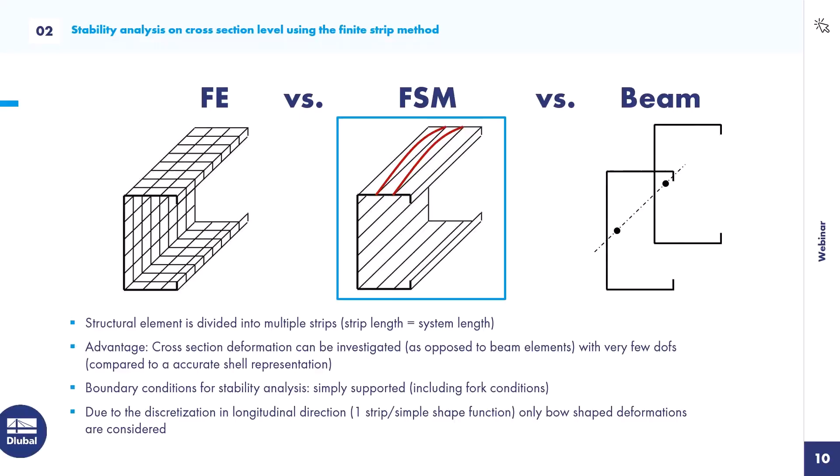So if we click it in the edit section dialog, it's done, and it finishes for like 50 analyses within less than 1 second. So this is quite a nice advantage of this analysis method. One drawback is, if we compare it with the shell element, that we can only investigate specific boundary conditions at the moment. So the results are only valid for a simply supported beam that is assumed in the background.

We can only assess results for unit loads at the moment, and we cannot account for any local load introduction. Also, we assume that the behavior over the length of the member and the loading conditions are constant. And because we only use one strip over the length of this element to represent this member, we can only investigate failure modes or eigenmodes that are bow-shaped, with only one half-wave deformation.

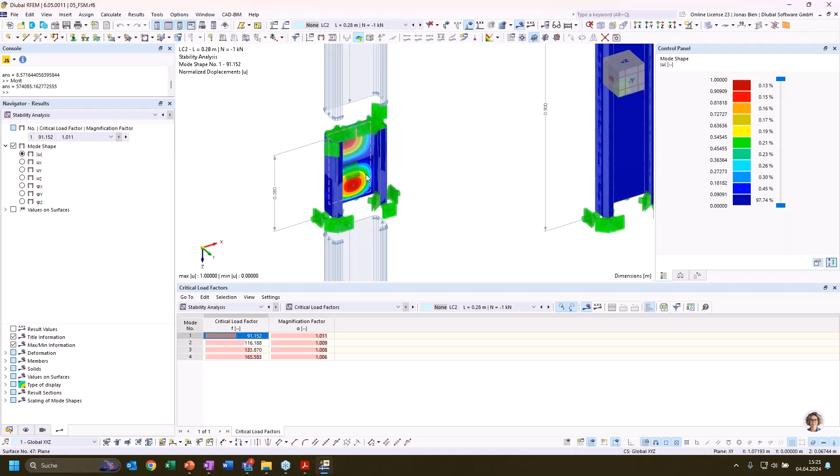But as we have seen in our shell model, there can be, for our second model here with a length of 28 centimeters, also local buckling as a decisive failure mode, and we have two buckles over the length of the section. This cannot be represented or investigated with the finite strip method as we have it implemented into our program.

That's why we should keep in mind that we not only have one curve for this local buckling with the bow-shaped deformation, but also a similar curve that has its limit or minimum at a multiple of the first critical member length. Here, the first critical member length was 14 centimeters, but at 28 centimeters, we have a similar bifurcation load, just that we have a multi-wave local buckling in the web.

We have multiple of these curves, so we should take the minimum bifurcation load for local buckling, or also for distortional buckling, as a straight line in this dialog. And if we compare this with the signature curve, we get a feeling at what member length global buckling gets relevant again before we have local stability failure.

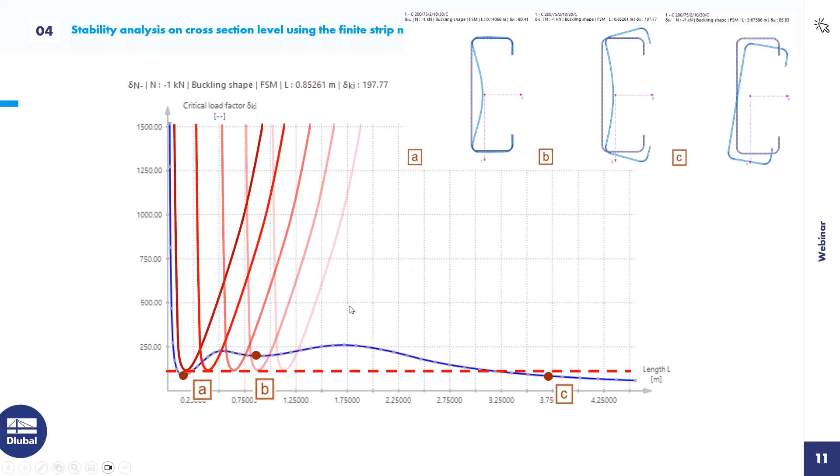This is not only a nice tool to get a feeling for which stability phenomenon can be an issue for my cross section. Depending on the member length I'm modeling, it could be that I can directly see, okay, local buckling is not a big deal, and distortional buckling is not interesting for me - I'm in a realm where global buckling will cater the design. Or I could say maybe I'm at a length where local buckling and global buckling could happen at the same time, and I need to take into account some kind of interaction between these stability modes.

It also has a practical use. For cold formed design within our steel design add-on, we use the distortional buckling curve evaluated on the basis of this finite strip method to evaluate the effective sections of our cold formed section. So we directly use this minima, the second minima of this distortional buckling curve, in the design of cold formed members according to Eurocode 3 part 1.3, and also for cold formed design according to the American standard, the direct strength method. So it has a practical use and is already implemented in the cold formed steel design.

All right, that's it for the second topic, the cross-sectional design. The two last topics will hopefully not take that much time to explain.

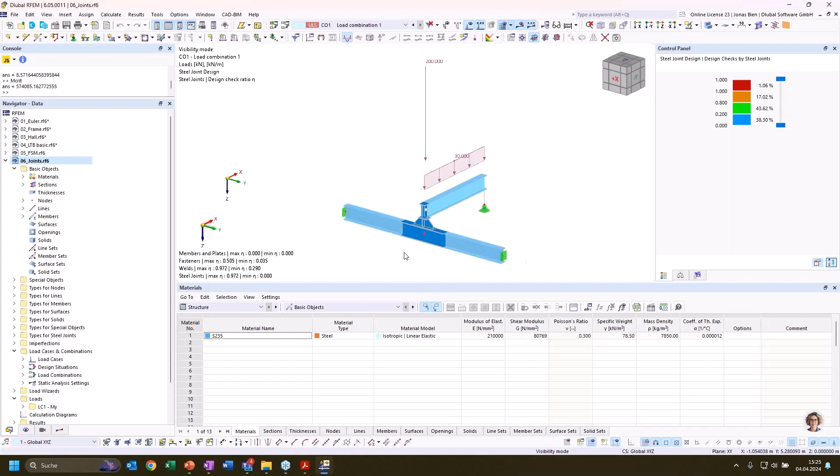I just want to mention as a side note that we can also perform the linear eigenvalue analysis within our steel joints design. To demonstrate this, I have here a relatively easy model where I have a connection between a secondary member and a main member. The secondary member is loaded, and I can not only do the usual steel joints design checks, but also perform a buckling analysis.

I first want to show you where I can activate it. You can find that in the ultimate configuration for the steel joint, and in the first point, perform buckling analysis. If you have activated it, then not only the resistance of the components is calculated, but also a linear eigenvalue analysis is performed, and we can assess the results via the table.

Here we also see that we don't only have the result values for the stress strain analysis, but also for the buckling analysis. In this table, we get the critical load factor for our 4 mode shapes that were calculated by default. We can also assess the mode shape by clicking on one of those table entries and opening the steel joints deformation or results button.

Now I would see the mode shape for mode shape number 1 in this particular joint. I can browse through the different mode shapes by clicking the different table entries, and I can see that for this particular joint, in the first mode shape, I would have some kind of web buckling under the load introduction here from the secondary beam.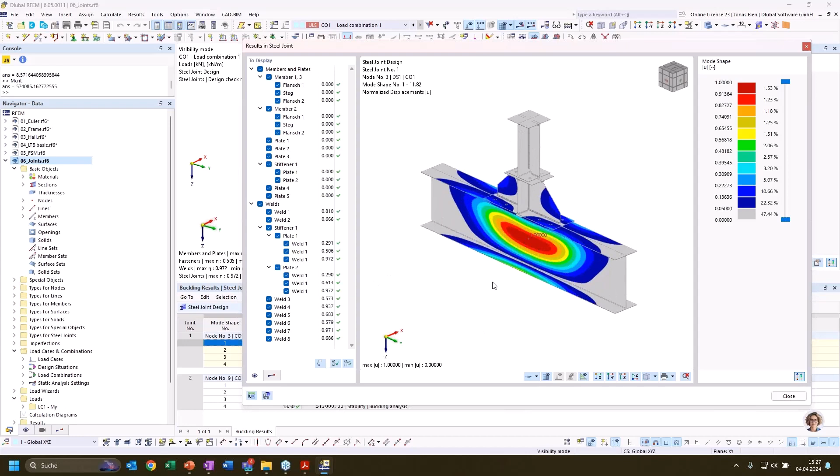I could take some measurements to avoid that, but I also need to take into account the critical load factor to judge how critical this mode shape is. We see that for the critical load factor of 11.8, we get this warning sign, which means the critical load factor calculated is lower than the default limit value of 15. But that doesn't necessarily mean we have a problem here.

The default bifurcation factor limit is derived from Eurocode 3 part 1.1, which is more for member design, and this limit of 15 should be conservative for most cases. But what I would suggest is to really study the mode shapes we observe here as a result of this buckling analysis, and then see if we can extract limits for this critical load factor from the respective parts of the design codes.

So in this case, as I said, we have some kind of web buckling under the concentrated load introduction here. So I would check chapter 6 of Eurocode 3 part 1.5, where web buckling under patch loading is treated, and see if I can derive limit values here.

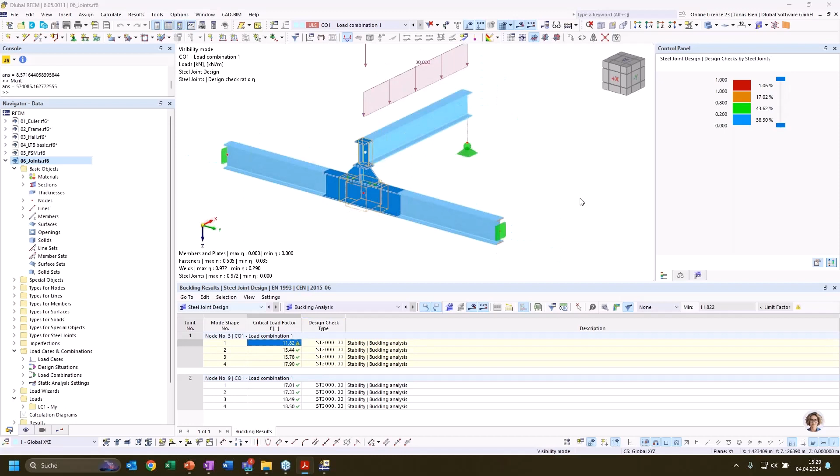If I know the correct limit value and want to improve the behavior, I can directly modify my joint. So I have a second configuration of this connection, where I just added a stiffener in the main beam, and we see that the critical load factor for this configuration has already increased from 11.8 to 17 just by adding these stiffeners to the main member web.

And if I observe the first mode shape, I see that my buckling panel is now divided by this stiffener. So every change directly affects the results of this buckling analysis.

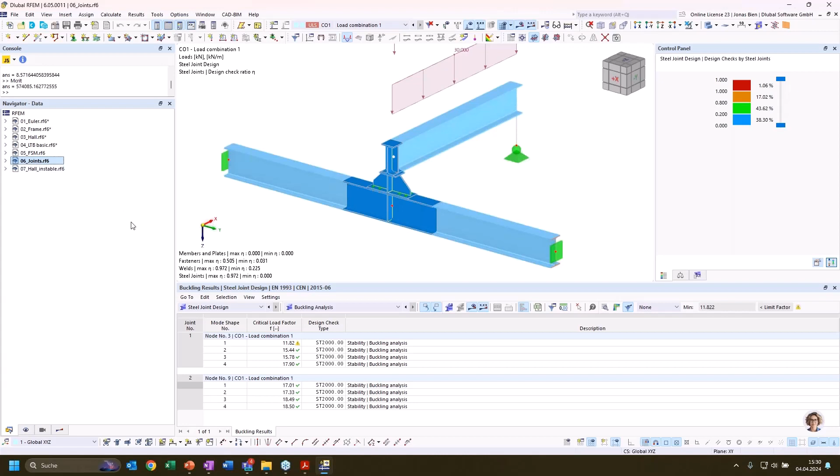Okay, then let's move to the last point. I promised to also show you how we can use the structure stability add-on to troubleshoot when we have some instabilities within our model.

I prepared another industrial hall. It's very similar to the third model, but here I reduced the number of load cases a bit, and I worked with load combinations, and I introduced some mistakes which lead to an unstable solution.

So for example, I would have modeled all my structure, put in all my load cases, and now I would like to press calculate and grab a coffee and enjoy that my model is calculating for me, letting the computer do the rest of the job.

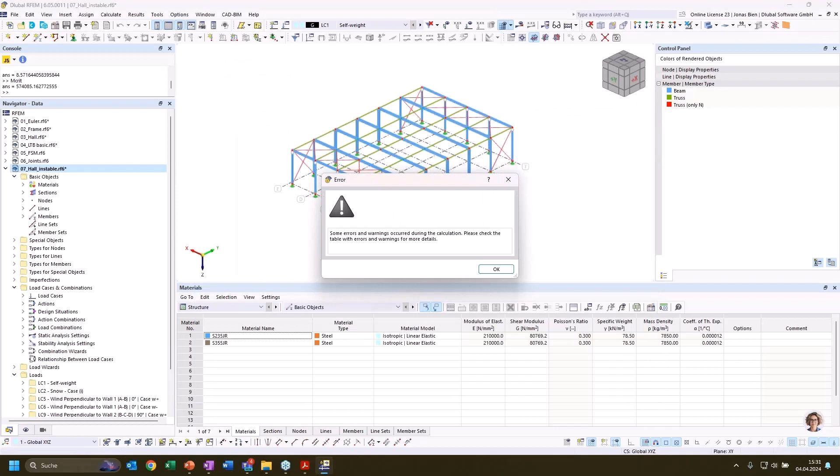But now I already see when trying to calculate the first load case, just the self-weight under first order theory, I get a warning message, and the program highlights that the stiffness matrix is singular, and I have a problem. It gives a hint where I could look for possible mistakes, but I can't really see anything wrong here.

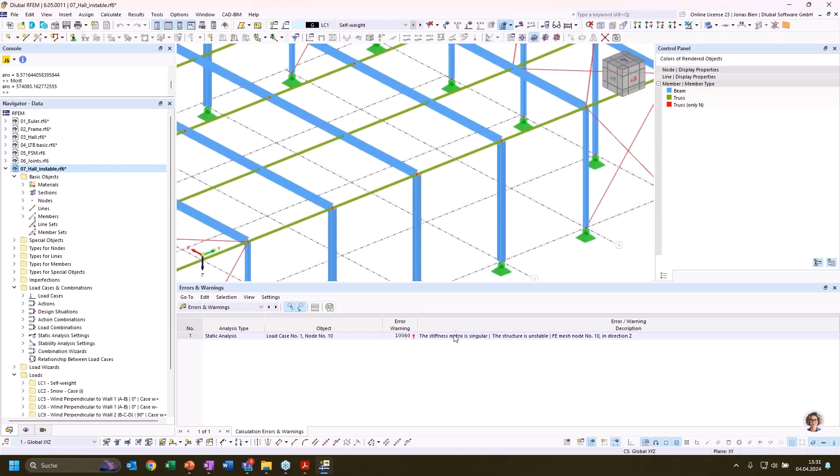I could now activate my structure stability add-on and apply an eigenvalue analysis with a specific setting. In this case, when I want to check for instabilities, I can say it should calculate eigenvalues without loading for instability checks. So it would look for eigenvalues of 0 value and calculate the respective eigenvectors.

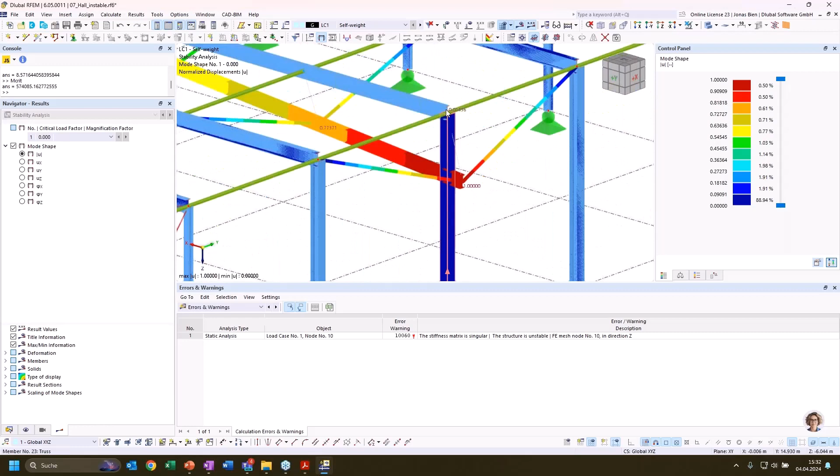And what I see now is that it seems like the girder in axis number 4 is more or less falling down. It seems like it's not connected to the beam. When I zoom in here, I see there are 2 separate nodes, and the column is not properly connected to the girder, which could be the reason for my instability.

So I just quickly resolve this issue and now try again to calculate load case number 1. Let's see if it works now. Again, I get an error message, and again I can try to get additional information with my structure stability analysis.

So when I click through the deformation results, I see that for the rotations around the global x-axis, something looks a bit off. I get very high deformation values, and it seems like the girder here in the last frame freely rotates, which indicates it's not properly connected to the columns, or some degree of freedom is not restrained properly.

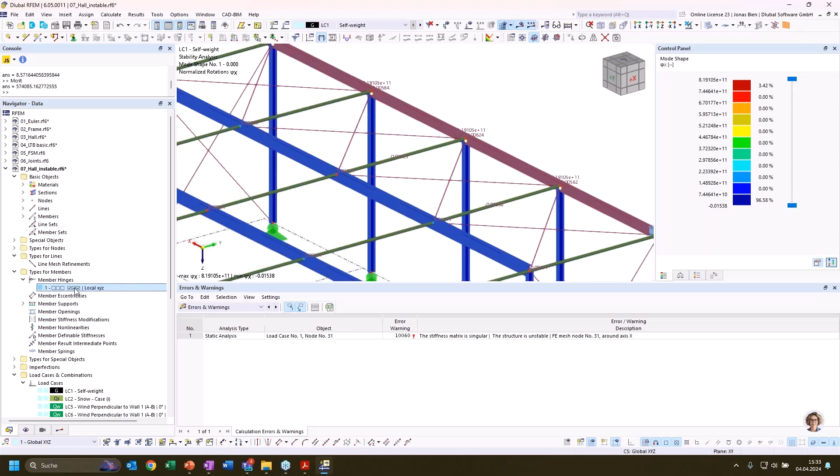And if I look into the definition of the connection, I see that I have a hinge on every column end, and I defined this hinge with rotations free in all 3 axes, which means this member can freely rotate at the top.

So maybe that was a mistake, and I wanted to establish frame action here, but I accidentally applied the hinges to all my columns. Now that I found this mistake, I can remove those hinges in the frame corners, and check a third time if the solution runs or if the simulation works.

And if I haven't done anything wrong, it should work now. Okay, now I get results for this first load case in my static analysis, which means that my model seems to be stable now. And now I want to go further and calculate all my load cases and load combinations.

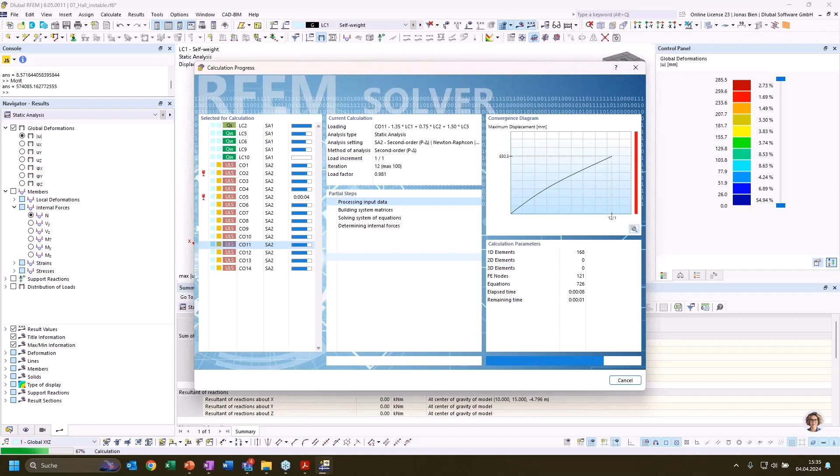That would be the second stage, and it is again not clear that I have no problems with my model, because my load combinations now I solve them with second order theory. And I again get only for some load combinations errors that my stiffness matrix is singular and my structure is unstable. So this message can have two reasons.

Either I have done something wrong in my modeling and I've disconnected parts, or some DOFs are free and not restrained in my model. Or it could mean that my system is really overloaded because I have now calculated according to second order theory. It could also be that I've reached the critical bifurcation load of my system.

In order to check this, I would recommend to go to the load combination that is problematic. For example, in this case, load combination 5 or 2, and I can just switch to first order theory and perform a linear stability analysis, just a regular one.

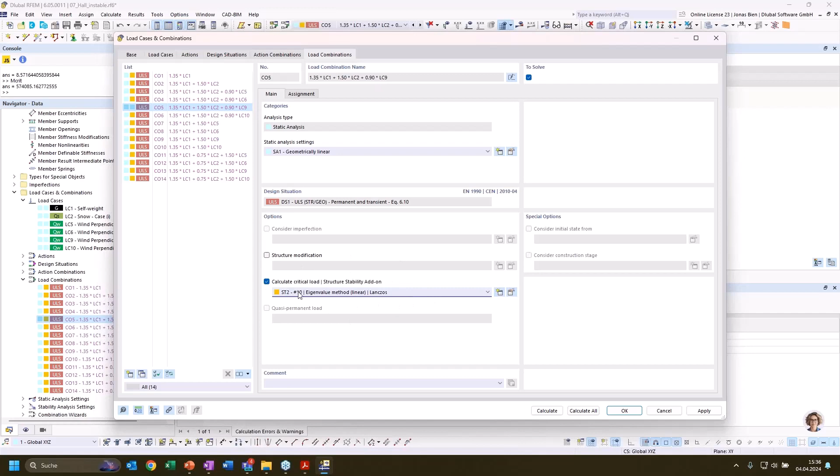Now I just use the second setting where I calculate 10 eigenshapes. Could have taken less because I'm only interested in the first mode shape.

And let's go to the results for my load combination 5. What I can see now is that my critical load factor is below 1, and that indicates that my structure is indeed unstable because it is overloaded. I can also check what could be the issue based on the mode shape.

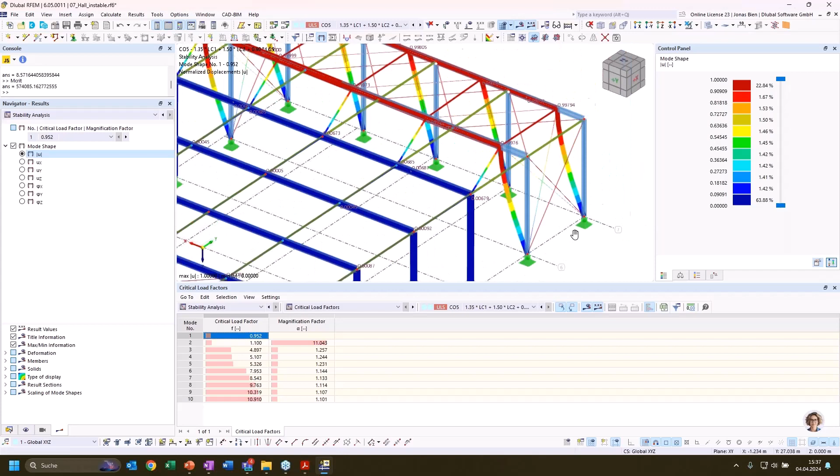And if I now look closely, I see that in my second frame I set the wrong columns. I set the columns from the end frames, which are much too weak for these internal frames. But this can also be quickly resolved by just copying and overwriting the member dimensions with the columns from frame number 3 or 5.

And if we now again perform the same simulation on our load combination 5, we will hopefully be able to get a suitable solution and a stable model. And now we can see, okay, with our first mode shape or critical load factor, we are above 1 and our model is good to go, and we have good chances that we can properly design the members within our structure.